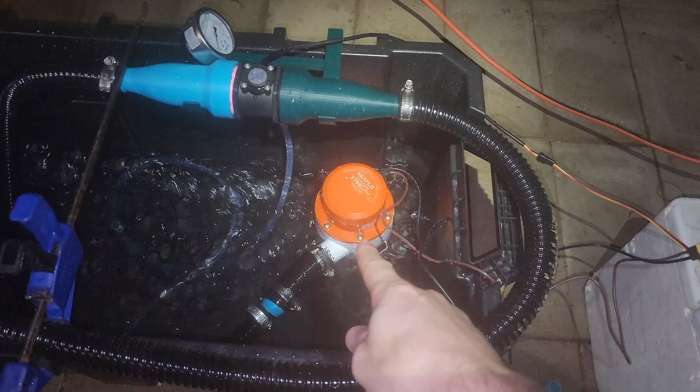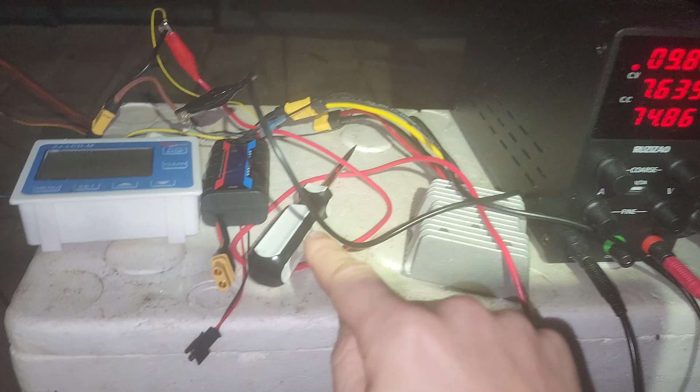Doing these tests, I don't have enough amperage to run this off of this power supply here. This peaks at 10 amps, but what I am able to do is provide, say, 24 volts, and then it uses less amps, and I'm running it through this DC to DC converter, which puts out a steady, according to this, 12.3 volts. So I did all of my testing at 12.3 volts.

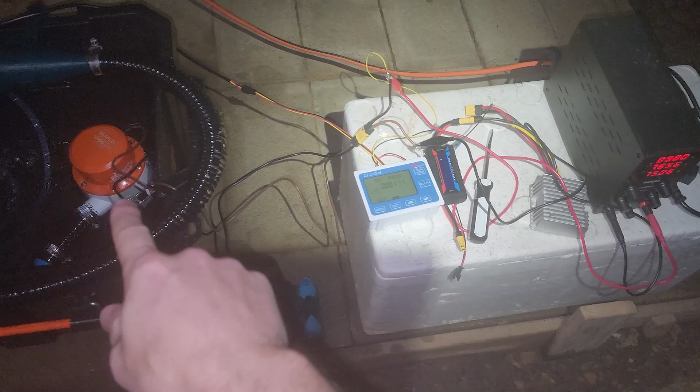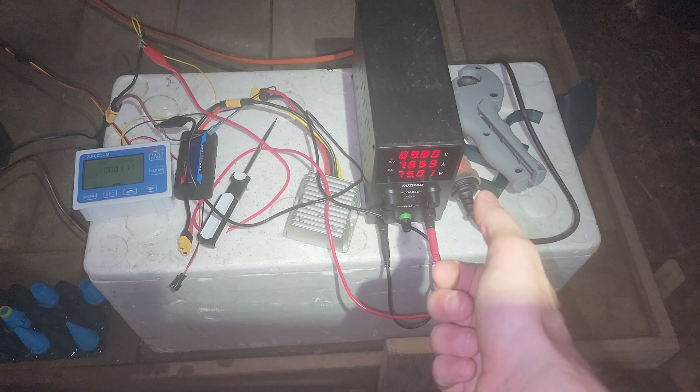And now what I'm doing is testing if I drop that 12.3 volts to 9.8 volts. This is about 80% throttle, and I want to see what going from 100% throttle down to 80% RPM throttle voltage actually does to which size nozzle I need, as well as actual power consumption.

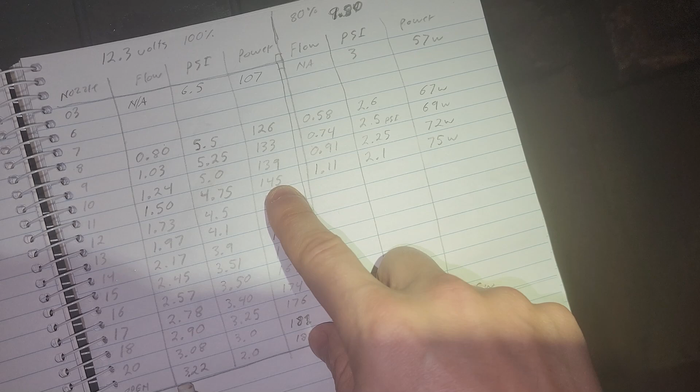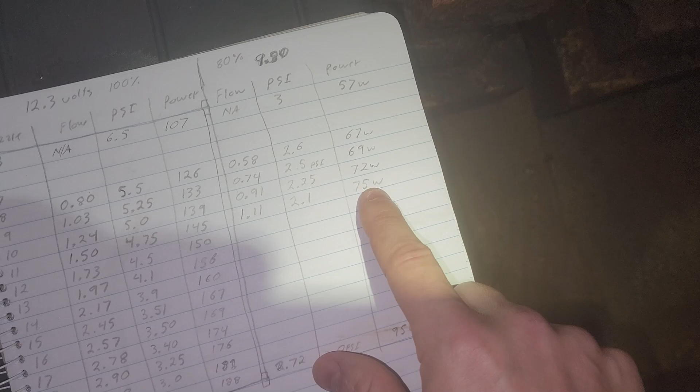So far, what's quite interesting is, for a 9 millimeter nozzle, I was at 145 watts at 12.3 volts, which would equal, I think it's around 3,000, I forget the RPM. Anyways, if I cut the RPM by 20%, so I'm running 80% instead of 100% throttle, half the power use. So it really does add up if you're running a gasoline engine at 100% throttle versus 80% throttle. Use a lot less fuel, I imagine. But anyways, that's the experiment, and we're going to see if the nozzle size also changes with RPM.

I'll be as quick as I can with the whiteboard here, but just what I've done so far. This is a 2,000 gallon per hour bilge pump. This is a 3,700 gallon per hour bilge pump. This was about $60 on Amazon, and this was $90. So for an extra $30, turns out that with these stock impeller sizes matched to the appropriate jet for each one, this will use about twice the electricity and give you twice the suction of this.

That being said, this is an 11 millimeter nozzle, and that is the ideal size for the 2,000 gallon per hour bilge pump with my special 3D printed impeller. It would be a 12 millimeter nozzle if it was the stock impeller.

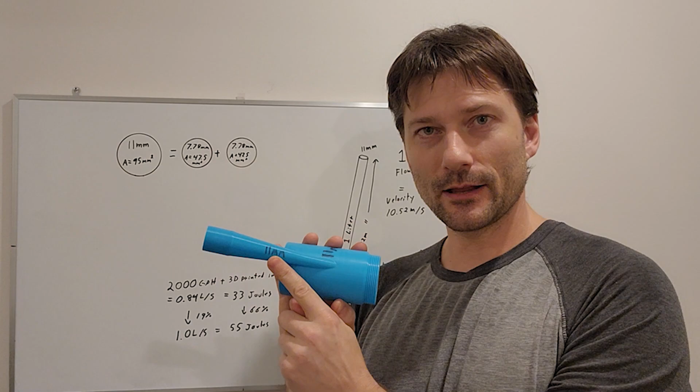And if I take that big 3,700 gallon per hour bilge pump and I connect it to this exact setup, I really don't get much bonus at all. It's just a little bit, because 11 millimeters is the correct size for the 2,000 gallon per hour bilge pump. For the bigger bilge pump, I actually need to increase this to a 15 millimeter diameter based on the testing I just did.

So how do you actually figure out what size of jet works best with your pump? How does the math work behind that? And this is just coming from the context of, there's somebody I've been speaking to who's designing a 10-inch dredge for Nome, Alaska. And they've got this big diesel pump kind of picked out, and they're like, well, what's the best jet size for this gold dredge?

Typically, I've heard like a 1-inch jet for a 4-inch gold dredge, or a 3/4-inch jet for a 3-inch gold dredge. And I've learned that that's not actually the case. Your jet size should be based specifically on your pump. It has very little to do with the actual size of your suction hose. Of course, your pump needs to be related to the size of your suction hose. If you have a really long suction hose, you need a bigger pump, and it all kind of comes together. But here's how we do it.

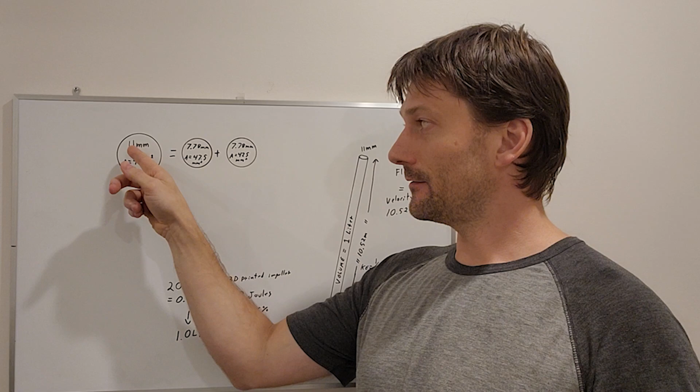So first of all, an 11 millimeter nozzle, which is the one I tested with, has a surface area of 95 square millimeters, just the actual area within that circle. If you cut that in half into 2 smaller circles with the same area, so each circle would have half the area, from 95 to 47.5 square millimeters each, from a single 11 millimeter nozzle, you would need 2 7.78 millimeter nozzles.

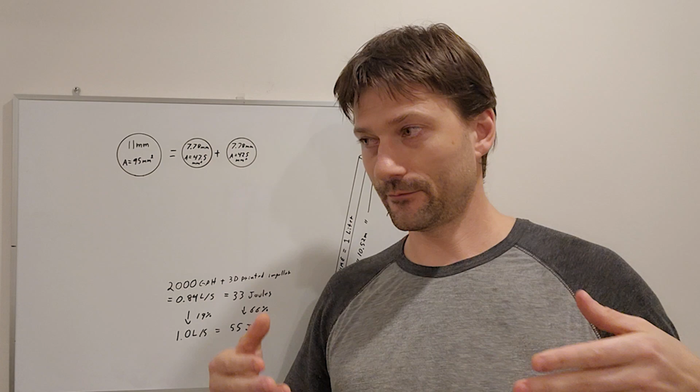The hypothesis is, so long as the area is the same, the jet should work the same, and for the same power going in, you should get the same suction. Based on comparing a single 11 millimeter to twin 7.78 millimeter jets, the suction is the same. It's not actually any more efficient to have a twin jet than a single jet, so long as the area of your jets is the same. And I measured the volume of water traveling through this single hole versus these 2 holes, and the volume was the same. What's interesting is, by having 2 jets, the water columns mix together in a shorter distance.

So if you have this jet right here, water's blasting here, the water's just going to squirt straight out the end. It's not going to mix with everything else in here and create suction. So you actually have to put an extra length of tubing here in order for that mixing to happen. Now, with a single jet, you need a longer length of tubing for that mixing to happen. If you have a whole bunch of small jets, it can happen more quickly. And the more powerful of a jet you're using, the more that would become important.

So if you have a big gasoline engine, the single jet, you're going to need a really long length of hose to allow the full mix to occur. Whereas if you want to put that jet fairly close to your sluice box, it's definitely going to be a good idea to have a bunch of smaller jets.

Still a little bit sick still.

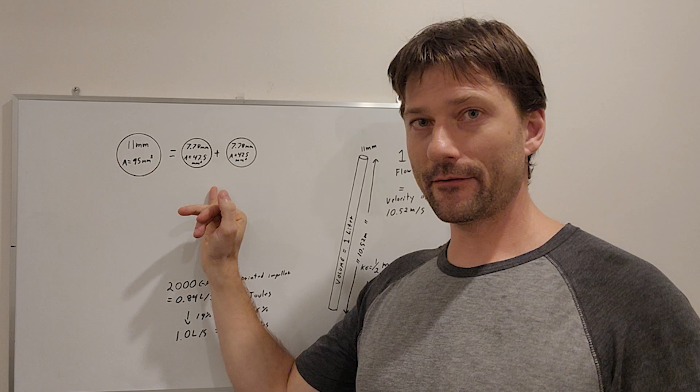So there is an advantage to having multiple smaller jets, but it's not overall efficiency. It's just you can have a shorter distance between the sluice box and your actual jet. But to determine what size you would need, if you had that big engine out there, I would basically just weld up some kind of a cone and saw off the end so you have a small nozzle.

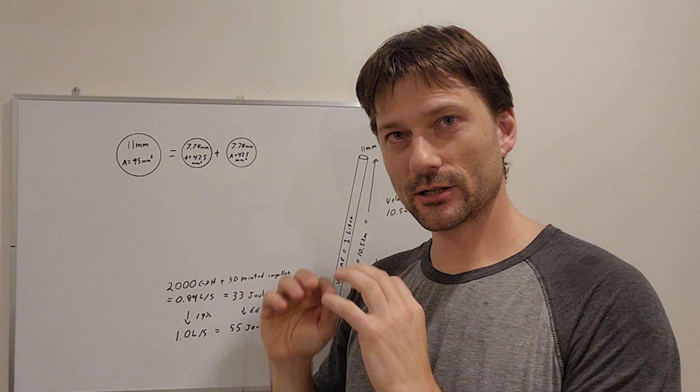Time how long it takes to fill some container of a known volume. So you have a 55 gallon drum or a feed trough. How long does it take to fill that with water? And then cut the nozzle back a little so you get a bigger hole, time it again, bigger hole, time it again. And then just gather all that data. And then here's the math you would need to figure out which size is actually the most efficient.

I initially did this by combining the pressure I was getting. So what's the pressure reading times the flow? It doesn't actually work that way. I think it was grade 10, like basic physics, is 1/2 of mass times velocity squared is your kinetic energy.

And that's what we need to know. We don't have to worry about Bernoulli's principle. Same thing with airplane wings. You can look at the way the air travels over a wing, and there's a low pressure and a higher pressure. You can calculate out the lift of that wing using pressure, or you can calculate out the lift of that wing just using the equal and opposite reaction.

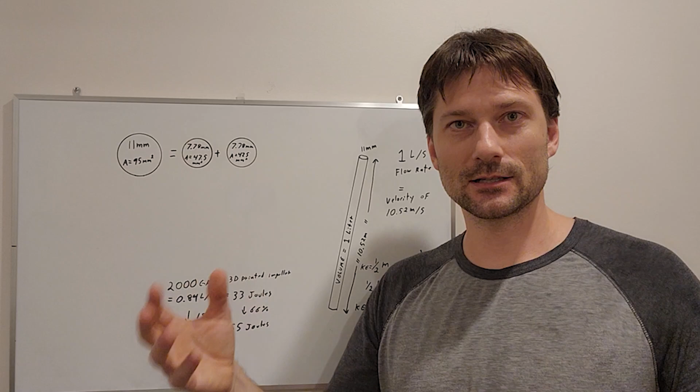How much weight of air is being pushed down per second is going to be the lift you're getting up. So you can use this. The same calculations will get you the same results. It's just different ways of looking at it. And I'm looking at this not based on pressures, but based on the kinetic energy contained in the water column.

So, before I lose you here, if you have a cylinder with an 11 millimeter diameter, and the volume of that cylinder was exactly 1 liter for ease of math, how tall would that cylinder need to be? If you do the math, an 11 millimeter diameter cylinder containing 1 liter of water would have to be 10.52 meters long. Now, if I know that I have a flow rate of 1 liter per second, then I know that this length would be coming out of a nozzle every single second, meaning the velocity of my 1 liter of water is 10.52 meters per second.

So kinetic energy is 1/2 of mass times velocity squared. The mass of that 1 liter is 1 kilogram. The velocity of this water is 10.52 meters per second times 10.52 meters per second. So V squared is very important here. So I basically go 1/2 of 1 kilogram times 10.52 squared, which gives me about 55 joules of energy. And since it's 55 joules per second, that's 55 watts.

Now, my real world results through an 11 millimeter nozzle with my 2,000 gallon per hour bilge pump was that I was getting 0.84 liters per second. Almost 1 liter per second, but just 0.84. My calculation determines that that is just 33 joules of energy. But if I go from 0.84 up just 19% volume to 1 liter per second, I go up about 66% energy to 55 joules from 33 joules. And that's because it's velocity squared that really matters.

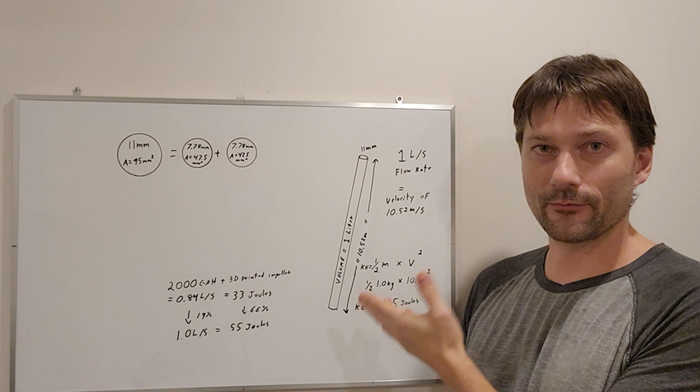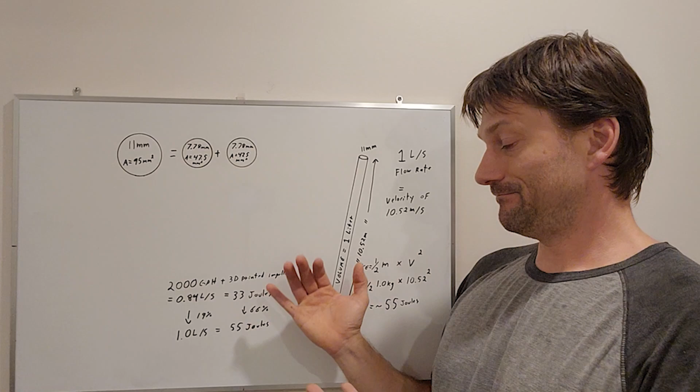So whatever pump you have, figure out the flow rate through a certain size of nozzle. You can calculate out the velocity based on the length of cylinder that a certain volume would take, and basically use kinetic energy equals 1/2 mass times velocity squared. That'll get you the joules of energy that are actually coming out through your nozzle. Then by trying a variety of nozzle sizes, I would recommend an Excel sheet so you can just enter your data and have everything calculate for you. You don't have to do it. But that's how you figure out which nozzle size gives you the most joules of energy.

And I did actually confirm this. I built the identical jet with 11 millimeters, 10 millimeters, and 12 millimeters. And the real world flow, the actual suction I was getting, worked out that the 11 millimeters was the best suction, based on the calculations. So that seems to be true.

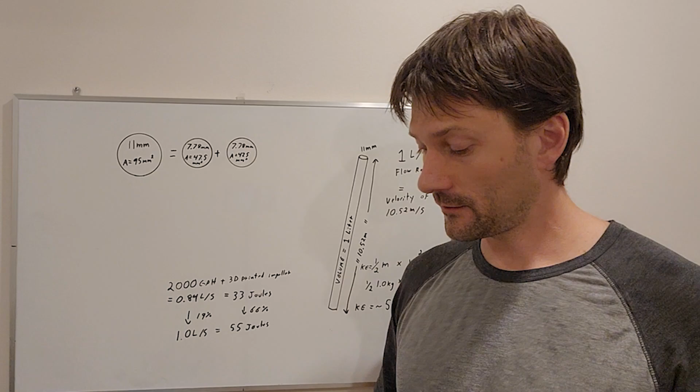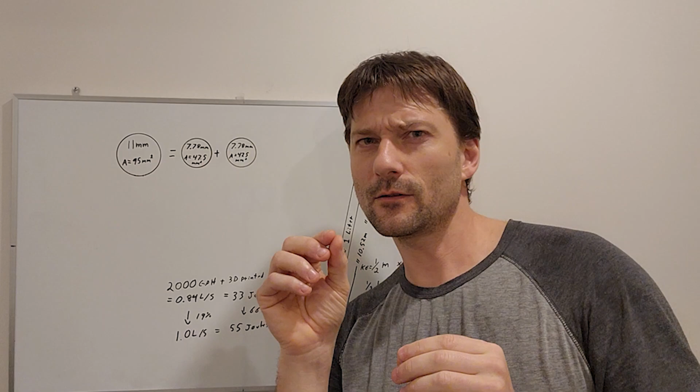Going forwards from here, what I've determined through my measurements downstairs is that the new big bilge pump is going to need a 15 millimeter diameter nozzle. I didn't test 15.3 or 15.4. I just went from 14, 15 to 16. But a 15 millimeter diameter nozzle will work best with the new bilge pump. So I have to design some sort of a Venturi like this that has a total surface area equivalent to a circle of 15 millimeters. That will work best with the new bilge pump, and it should use about twice the electricity and give me about twice the suction of a stock 2,000 gallon per hour bilge pump.

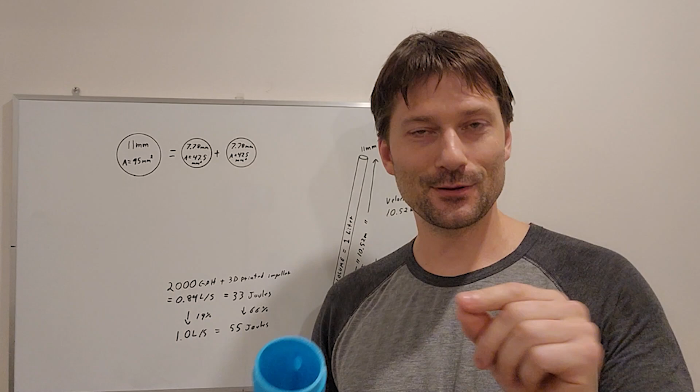Of course, I increased the efficiency of my stock 2,000 gallon per hour bilge pump with the 3D printed impellers I've made. I think there's something over 30% increase in energy output based on just a 3D printed impeller. So I will obviously have to work out the correct impeller for this new bilge pump at some point.

But initially, it's a bigger, more powerful bilge pump, and without any modifications to it, I should see a significant increase in suction just based on using a bigger bilge pump, providing I enlarge the size of these holes. So I'm gonna 3D print a new one of these to match the new bilge pump, and then we can sort of see how our suction is and if we're on the right track.

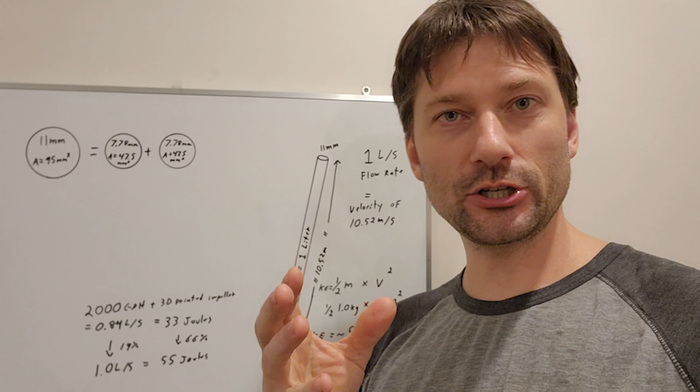One last thing real quick: if you had that gasoline powered engine and it was running at 100% and you'd selected the exact size jet that you want, or the area of the jet that you want, what if you only run that at, say, 75% throttle? How does that affect the size of the jet? I was a little bit surprised about this. My hypothesis was if you throttle down, you would need a smaller jet because you've got less water to take advantage of.

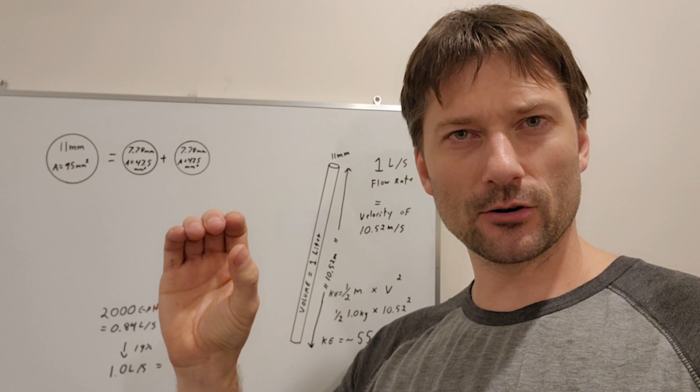Turns out that based on the test I just did, running at 100% throttle, it was a 15 millimeter diameter nozzle I need with that pump, and using the same impeller and whatever that pump design is, if I throttled down to 80% of throttle, my power use dropped by almost 50%. That's that velocity squared thing again. If you lower your RPM a little bit, you lower your power output a lot. So that's something to consider.

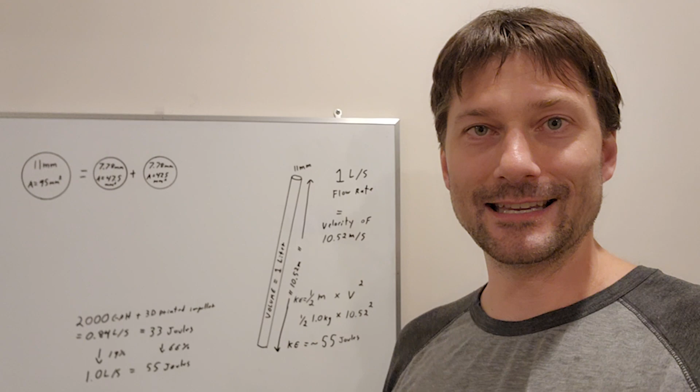But even dropping things down so that my power output was about 50% of where it was, running 80% of throttle, the same 15 millimeter diameter was the ideal nozzle size for that pump. So for example, if you happen to have a 4-inch dredge, typically you're supposed to go with that 1-inch jet, and a 3-inch dredge might only have a 3/4 inch jet.

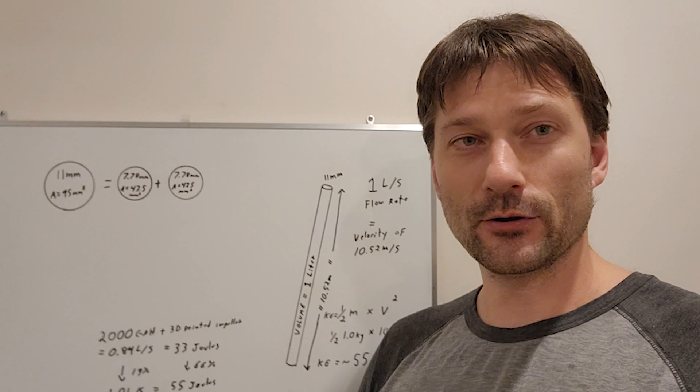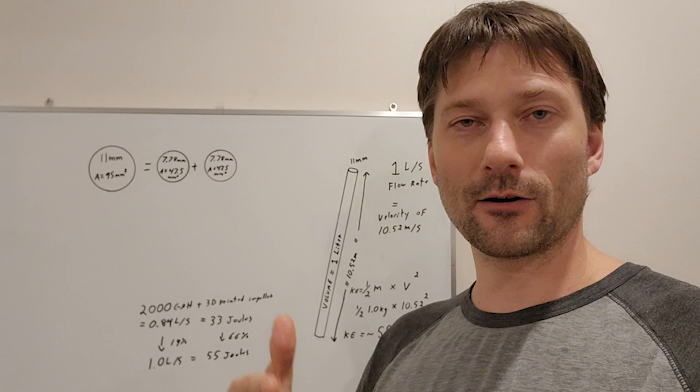If you're using the same pump, say you have a 6.5 horsepower Honda pump running a Keene P180, whatever size jet works ideally with that pump, it would be the same jet size for your 4-inch and your 3-inch, because even if you're throttled down, so you're only using half throttle or 3/4 throttle with that 3-inch dredge, the nozzle size that's most efficient happens to be the same based on my testing.

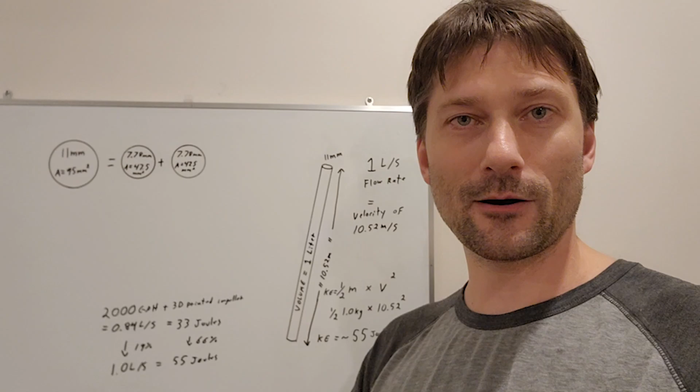Now you might still see a 3-inch dredge with a smaller nozzle size because you would typically use a different pump with that dredge. Like you might have a pump designed to go with a 4 horsepower motor, and so the pump would be different, and that's why you would see a different size jet. But for whatever pump you're using, it seems you figure out the area that works best with that pump, and that's what you go with regardless of the size of your dredge, according to what I've seen so far. So that's all I gotta say.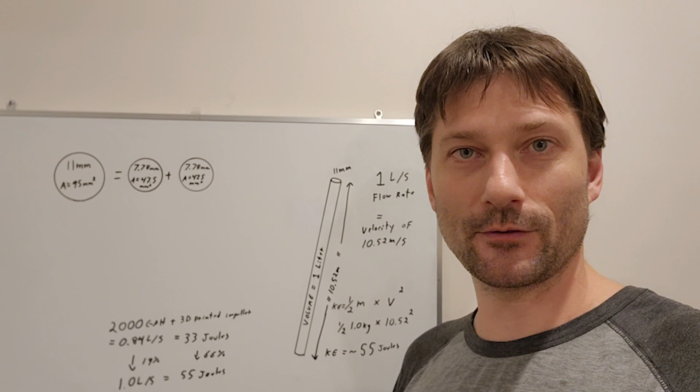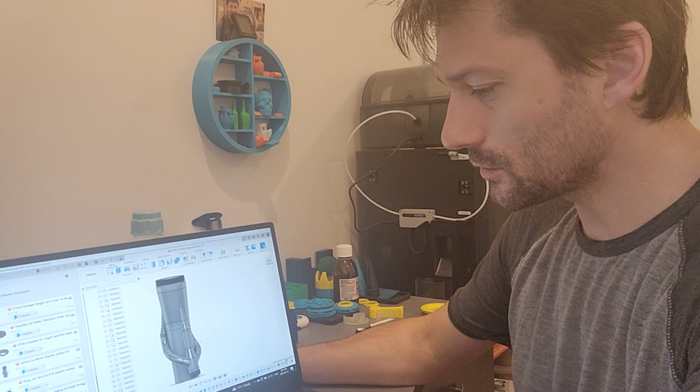Let's get 3D printing. So what we've got here is the next Venturi I'm going to print. It is a triple jet, so there's 3 jets, and it took quite a bit of effort to figure out the plumbing to put everything together here. And the other thing I've done is it flares open at this end, so the velocity of water traveling through this thinner section, once you add additional water from these 3 jets, there's more water, so the velocity would increase. I've just coned it open so the velocity will stay consistent.

There should be a slight increase in efficiency because this is now a 5-degree better angle, and because of the slower velocity in here and this, the delta between those velocities should give me a slight bit of efficiency.

But the reason I wanted to put this one little clip into this video is to show you the process: there's a period where you just sit at the computer and you try to make something, and then once it's ready, you press a button and this box over here turns it into something real. I'm about 90% sure this will actually print out. You've got to make sure that you don't have overhangs and little things that won't print properly, but I think everything should work, and then I can get to testing this.

And what I wanted to quickly touch on, and I know this is sort of a video about a gold dredge, but it's also a video about how I've been feeling sick for the last, over 3 weeks now.

One of the things that happens when you're sick is you don't exercise, and then it's harder to sleep at night if I haven't done some exercise throughout the day. But the same thing happens with your mind: you have all these things you need to do, and you're just too tired to do them, or you have this lack of energy, and especially coming to the tail end of a sickness, I should be better now, I'm feeling a little bit better, but the brain is still brain fog.

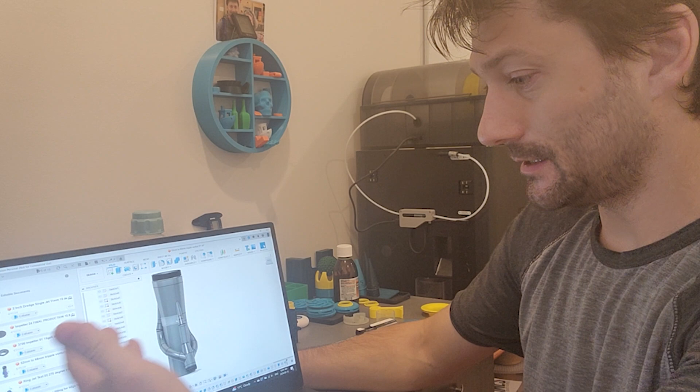For me, this is sort of that moment. I've got this thing, and you can sort of look around. I got all the pipes lined up and everything. There's threads in places. To actually create this, for me, it still took a lot of time and effort, but as I'm doing it and I hit a dead end and I don't know how to wrap this pipe around the edge properly, I watch a video on how to do it, I learn how to do it, and then you go in and do it, and eventually you can actually get there.

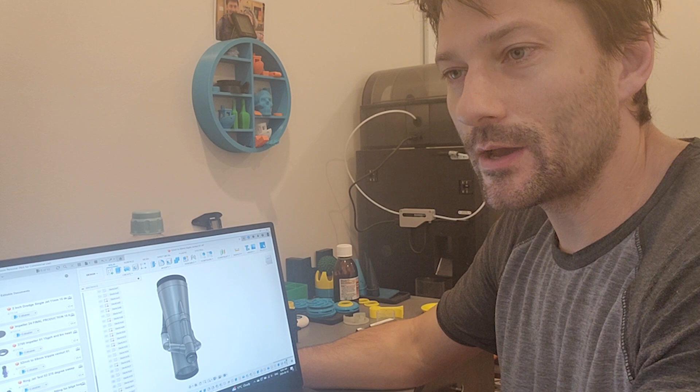And I'm literally the person who's like, no, I'm not a computer person. I don't do that. And this is another little wake-up call, since you're not forced to learn something like in university, where you might have to learn how to use Excel, which a lot of people would say is very simple. Everyone knows how to use Excel, but Excel is this incredibly complicated, random graph, like, how the heck do you use Excel?

Or Photoshop, or a video editing program. All of these things are just these impossible things that, well, because I don't know that, I could never do whatever it is I want to do.

No, you just accept that you're going to suck at first, accept that you're going to fail many, many times, chip away at something, believe in yourself just a little bit, and eventually you'll get there and you'll figure it out. And all you have to do is put in the time and, I don't know, try.

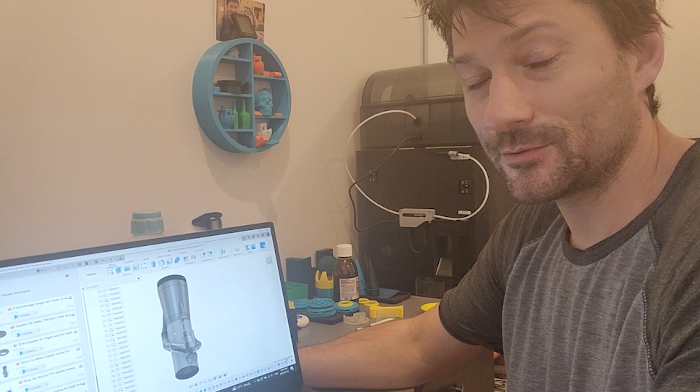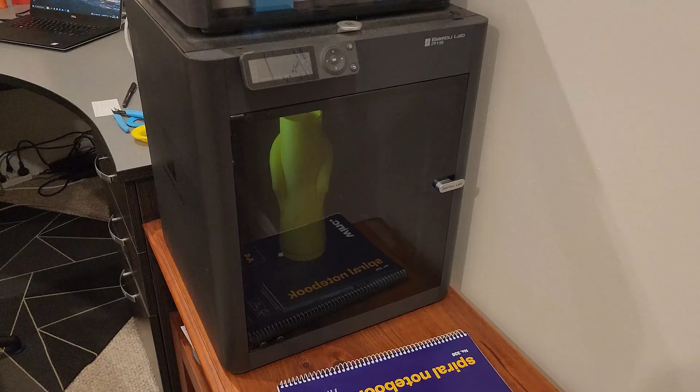So for whatever it is I'm blabbing about here, made a thing. Once this is done, it goes into this box and we'll see if it actually works or not. Print and send it. Takes it from here magically through the air to this wonderful box. Ooh, let's see how this turned out. So it should just sort of break off the base.

Okay. First look, threads turned out fairly well. And oh yeah, I think that's all nice and tight. I don't know if this is going to focus, but we've got a triple jet. Yeah, I like that. Looking forward to seeing how this works with the big bilge pump compared to the old one.

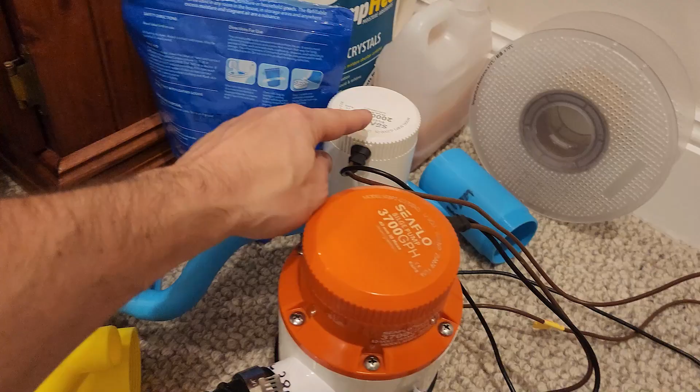So it's the same size intake as before, and then I flared this open a little bit, and these 3 jets are equivalent to a 15 millimeter single nozzle, and these were the equivalent to an 11 millimeter single nozzle, because that went with this pump. And this is the stock bilge pump.

A future project will be to play with impellers to see if I can improve this, but yeah, this has the secondary side effect of slowing down the water on the exit side, so I can go straight into a flare and a sluice box pretty quick right after this, assuming we get good enough suction for that to work.

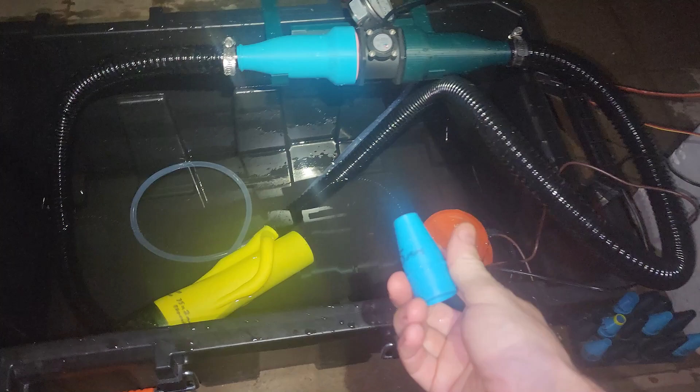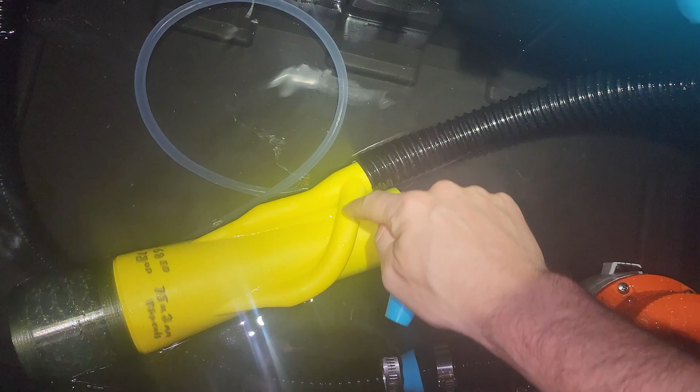Quick test on the test stand here to confirm this is a 15 millimeter nozzle where I got my best results. That is split into 3 different nozzles, but I just want to see how close I am to the same flow and pressure that I got with this versus this, because here it kind of makes a sharp corner right there, and in testing I noticed that this jet gives a little bit more pressure than these 2 side jets, so I'll have to redo this curve a little bit and make it a little bit more evenly angled right at the top there.

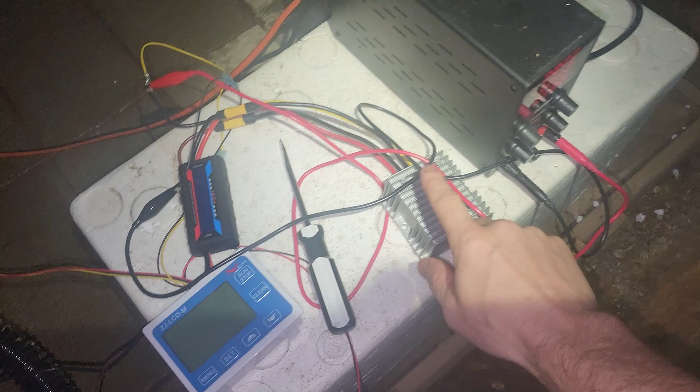But I'm pretty close to the same flow. I just get a slightly higher pressure, lower flow with this, indicating a little more resistance in the jetting. But I am going to see if I can actually fire this up and film. I'm going to be providing probably about 24 volts. It goes to this converter here, so you can run any battery, like 18-volt tool battery, whatever, and then this will give you a constant 12 volts.

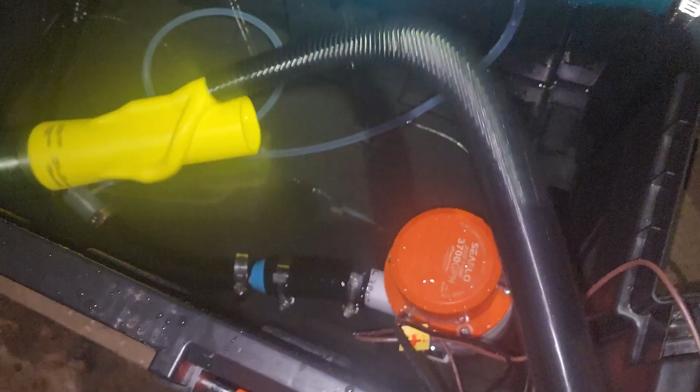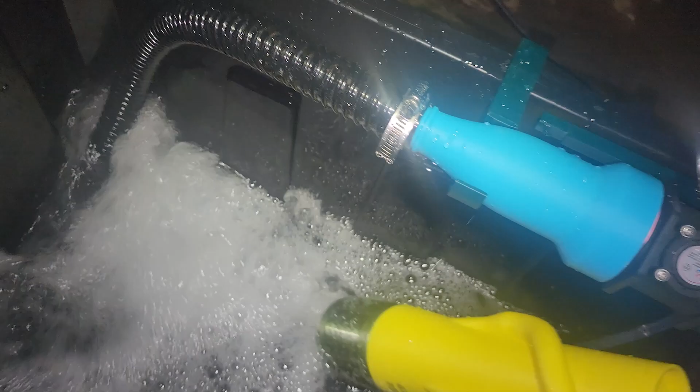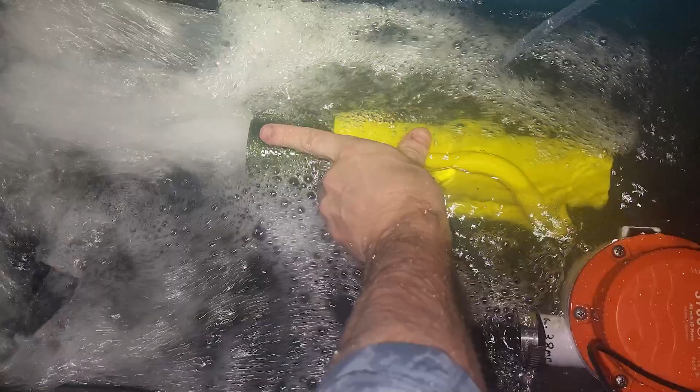This is my power meter, so I can get readings off of directly what that's using, and we'll sort of see how everything works. But I'm just going to show you what this looks like running, so we're going to fire this up. Actually pretty even. It's not too bad, but it could be improved a little bit. And just get everything coming out the other end here. Yeah, I'm just getting wet. I don't have a long enough tail right here to fully mix, but there's clearly suction even now.

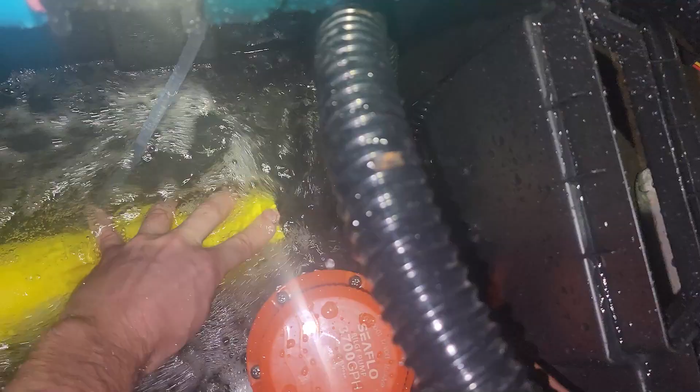So I'm going to put the camera down so I can let go of this without getting sprayed, and we'll test the flow meter right here, but connected to here so you can see what amount of flow is actually going up the nozzle there. Whew. Yeah, good times. Oh, hello up there.

So I'm inside at the bathtub. I need the bigger tub here when I get this whole thing assembled. I can test the impellers and stuff in that tub under the house, but to test this, I just come in to use the bathtub.

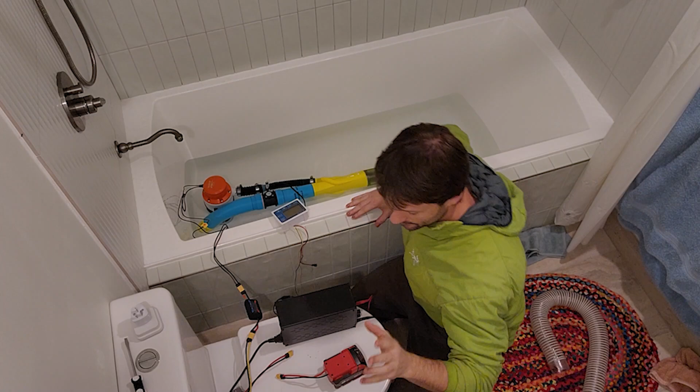I'm wearing a jacket inside because in Australia, we don't really believe in insulating our houses or putting in any sort of central heating. So you basically just have a space heater in your bedroom or your office, and the bathroom right now is a little bit freezing cold. Basically, if it's 15 degrees Celsius outside, it's 15 degrees Celsius inside, and that's a little bit cold for me. So the jacket.

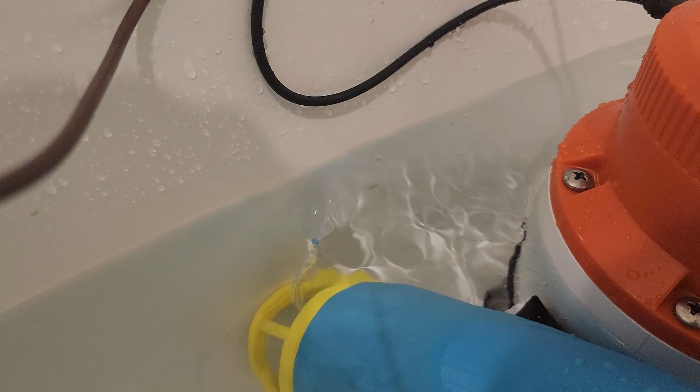Pretty solid. There you can see we're sitting roughly at about 160 to 163 watts. That's the amount of power we're gonna be using right now. Just going by feel, this is good enough suction to dredge with.

It's not like if you were to turn the engine on your 2-inch dredge where, if you got a rock stuck to this, you can't even peel the rock away. So it's actually kind of perfect right now. This will definitely get you the suction you need and get down into some cracks a little bit. Not bad.

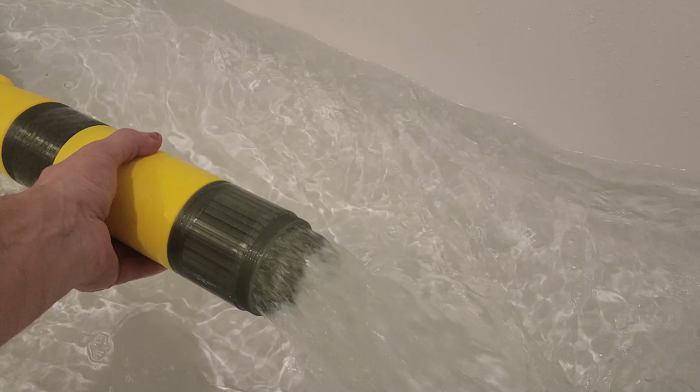Here I'm expanding things open. I did this for some efficiency reasons. I'm probably thinking I explained that earlier in this video. But right here, let's see if I can get you a better angle here. That is a decent amount of water being moved. Because the tube gets bigger, it slows down a little bit. And that's not going crazy fast.

So what I did is I looked at a video of my old high banker. Let me just shut this thing off here. There we go. So I looked at a video of my old high banker, and I tried to time how long it took the bubbles to go down so I could see what the velocity of the water was going over that Pop and Sun sluice matting. And my theory is that if I get the same velocity of water traveling over a sluice box, even if it is a subsurface sluice, I should see maybe similar capture results.

The issue is, in a full-size sluice box, you've got a bit of an angle, the water's going fairly quickly as it's going downhill, and you can get a wide sluice. So in the case of my high banker, it's 10 inches wide, well, 2 levels of 10 inches wide. Now, this is a lot more volume of water. The volume going through here is higher, but because this is tall, I can't make it 10 inches wide, or it would just be going way too slowly.

So I did some ballpark napkin math, and I determined that this, which is roughly 4 inches wide or about 100 millimeters, I can't remember exactly, but not super wide, should give me the velocity of water to make the sluice mats work in a similar fashion to what I saw in my high banker. That's sort of my theory right now. So I'm going to screw this on the end and just visually see what it looks like to see if I'm roughly ballpark.

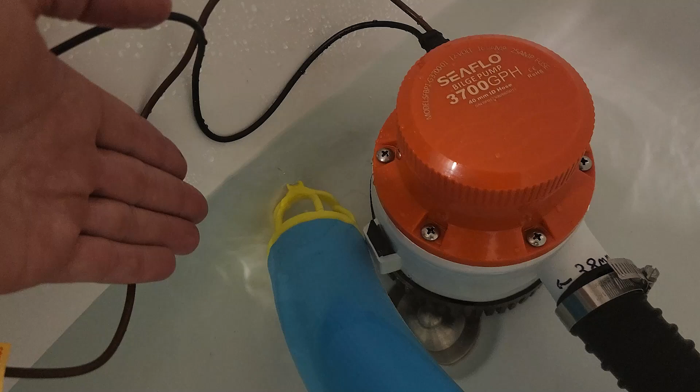So it's slowing down enough that it's only filling the bottom half of this at the surface. But if we get right down to proper, fully submerged, the velocity isn't crazy high. Like, I don't actually think I would need to slow this water down, providing I had a semi-aggressive sluice matting in the sluice itself. And then there's no reason to lift this above the water if I can get away with full subsurface. But yeah, like this, it's got really good suction.

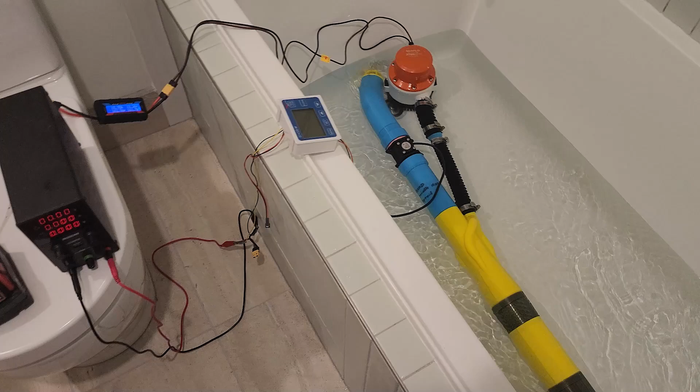So I don't have this hooked up. I've got to hook this up to this thing to get the numbers. That's what I'll do right now, is I'll figure out what the numbers are with this, and then we'll throw the extension on it and see how that affects things.

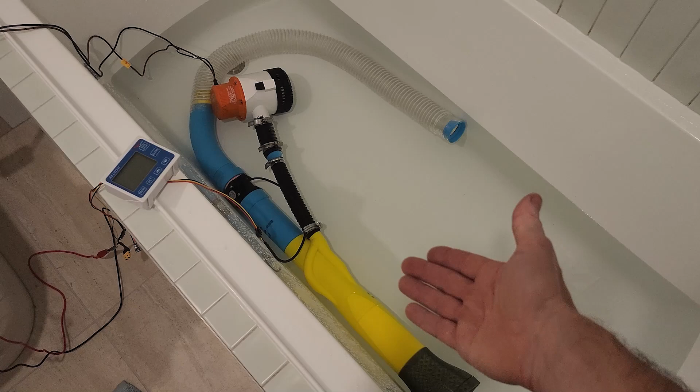All right, so to conclude this video, we have a functioning gold dredge. This is a 3,700 gallon per hour bilge pump, and with this Venturi, it sucks well enough that you could move gravel through this tube. That is for sure. With this tube, this is not the best tube as far as skin friction and resistance.

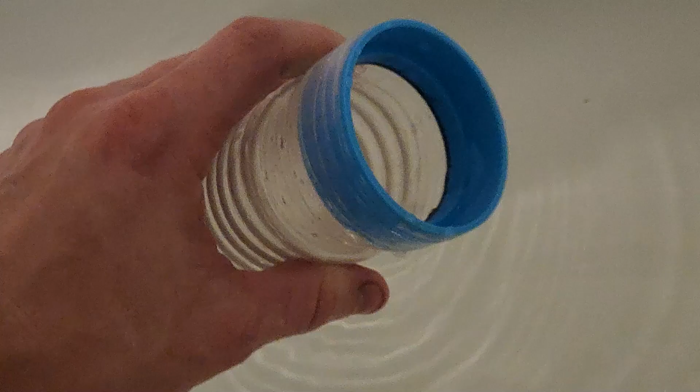You can see it squishes like this, so it sort of accordions, and the edge gets all zigzaggy. I don't know if we can see that in here very easily, but there's a lot of water resistance because it's such a soft tube. I've had trouble finding the nice Tiger Flex Keene Engineering dredge hose here in Australia, but that dropped our suction by 22% over just sucking up this little 3D printed smooth nozzle. So definitely significant, but still would work.

I would want to have a little more efficiency here, or maybe a better impeller in order to use this crappy hose. But with good dredge suction hose, a meter long, connected to this sucks gravel. It would actually function. Like, the plumbing of this dredge is complete. That I need to extend out into a bit of a sluice box. That some point in the future is something I have to do.

And an interesting thing I played around with, this is just rough top conveyor belt. We're going to get in close here for you. The rough top conveyor belt has these little squares that stand up and kind of create vortexes and then go into these dips. And what I really like about it is each one of these troughs has linear breaks in it. So if you were to tip this side to side, or in an actual sluice, there's turbulence, stuff's moving all over, and you don't have these solid troughs side to side where material can get sloshed side to side. So I built a 200% scaled up version of this right here.

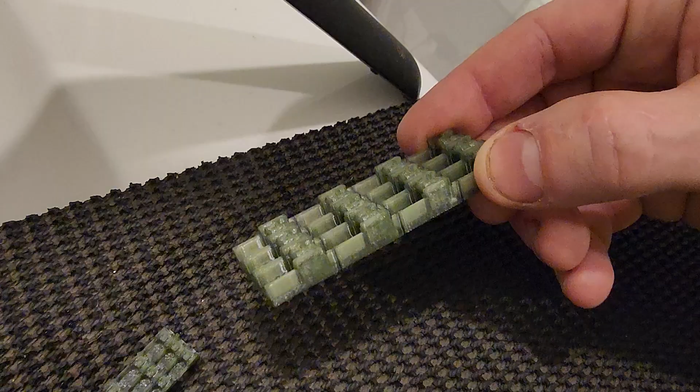And what's kind of neat is instead of those little squares on top to create vortexes, I don't know if you can see them, they kind of look like little arrows on top here. So the water flow would be going that way. But those are the vortex generators you might see on the back of a little Subaru WRX. So that would create a vortex to suck stuff down into this hole here. And just playing around with the fact that a 3D printer could, in theory, 3D print your sluice mat.

And for something like what we've got here, you basically need like a 10-inch long sluice, or somewhere between 200 and 250 millimeters, which is conveniently the size of my 3D printer. That's all you really need to get the low-hanging fruit. If you're going after that Alberta fine flour gold, it's a whole different animal. But normal fine-ish gold is actually really easy to capture in the top of most sluices.

So maybe we can use a 3D printer to come up with something that extends off of here. I kind of like the idea I've got going with this flaring out like that, and the speed I'm getting off of this looks actually pretty good.

That's 100 millimeters wide. So how we actually get a proper gold dredge out of this, I'm not entirely sure. Lots of different ways of doing that. I've been talking to a couple people. One guy in France, he just bought a 3D printer. Congratulations on that, by the way. And yeah, so he's doing some testing on this as well. And he's got a place where he can go and use something like this. And I've also been talking to somebody in Brazil, and same idea, they're testing different things out.

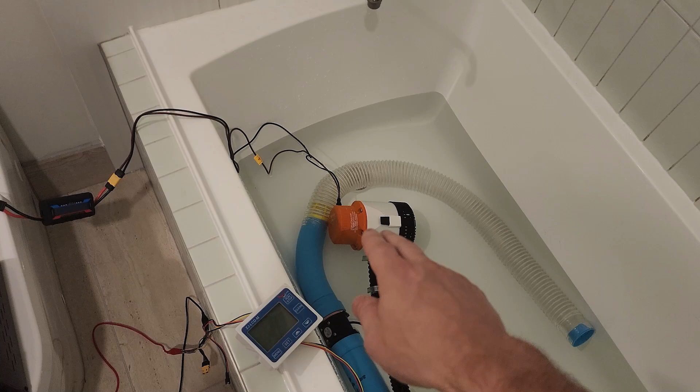And when I did this with a 2,000 gallon per hour bilge pump, this is the 3700, I forget exactly what it was, but it was over 30% efficiency gain just by 3D printing a special impeller. So imagine if I did that with the impeller being improved, this being improved, like a nice 1 meter actual dredge hose. Like this thing is going to be pretty darn powerful for an electric 2-inch dredge. And considering at some point I was just wondering if this would even work, it definitely works, and there's still like low-hanging fruit for improvement.

So I'm not sure exactly where I'm going to go from here. I might go do something else in the next video and then come back to this project, and it's just going to be churning away in the background. But initially what I want to do is I want to experiment with the Venturi a little bit more. I want to see if I can get that triple jet lined up a little bit nicer, as well as I have an idea where it's like maybe an 8-jet system, but just like a water jacket.

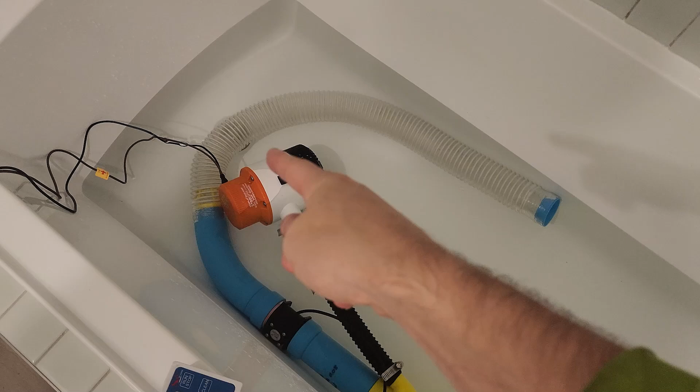Right now the bilge pump is pointing forwards, which might kind of get in your way. So you could just have a longer hose and have this bend back over here. But if I did like a water jacket around here, instead of this pointing forwards, I could have this pointing sideways, for example, or at an angle backwards or something like that. That might be a little more convenient to get this out of your way. So yeah, not entirely sure what's next with this, but the plumbing works. An electric gold dredge is absolutely possible.